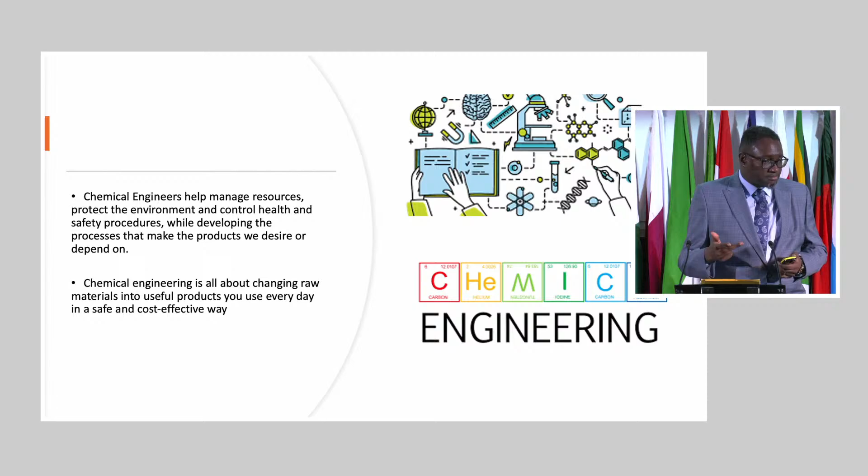Chemical engineering is primarily about taking raw materials and converting them into useful resources that benefit people and benefit society. And the aim is to ensure that it is safe, that it is environmentally friendly, and that it is done in the cheapest possible way, or in the most cost-effective way. And that really sums up everything that I've been doing as a chemical engineer for close to 20 years.

I'm going to ask you a question in a minute, because there's another group of people that actually do the same thing, who take raw materials and convert them into items that everybody uses every day. Can anyone tell me who those are? So they take raw materials, they take it through a process, and then convert it to things that we use every day. Any guess? That's right, very good, chemists. So I'm going to ask you in a minute what you think the difference is between chemists and chemical engineers. But before we do that, I'm going to take you through another poll here, which is, I'd like you to tell me which one's the odd one out.

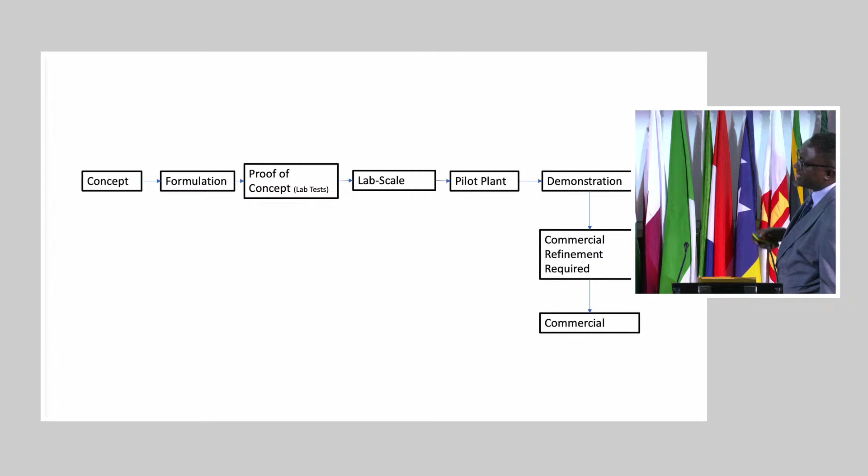And then at some point, when that's successful, you might have a company that says, we're really thinking of ways of reducing nitrogen oxides. So we're going to use one of our actual plants, and we're going to let you come and do this experiment on one of our actual plants. And we'll call that a demonstration.

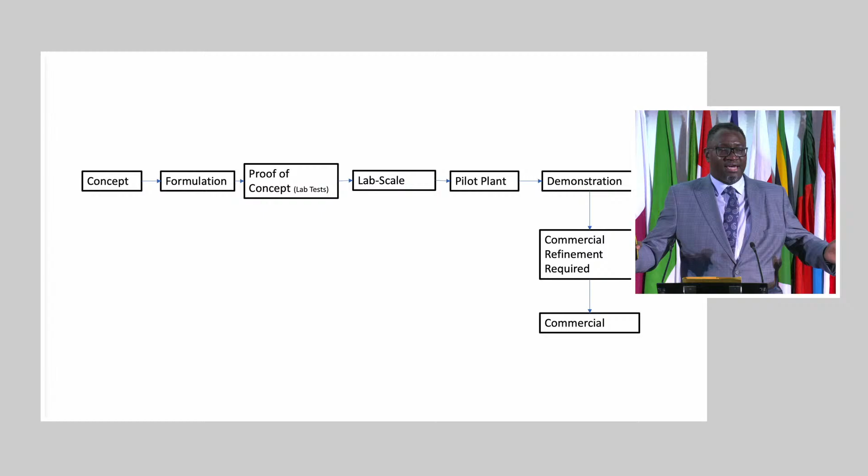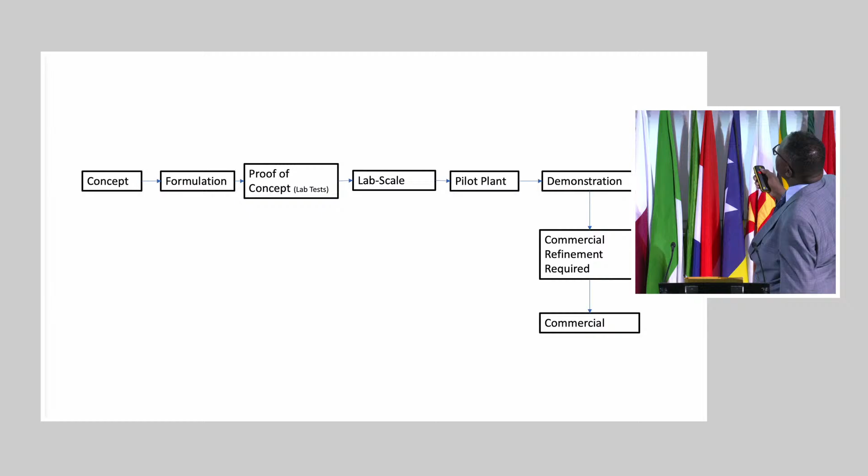So very often you'll hear that, oh, you've got this CO2 reducing technology, and it was successful at Shell, and it was successful at Longannet Refinery. And everyone will say, well, what's the problem then? Why aren't we doing it? Well, you've only really demonstrated it. You haven't done the commercial bit. And then you get to that point. So as you can see, there is a very long process of going from a concept to commercial.

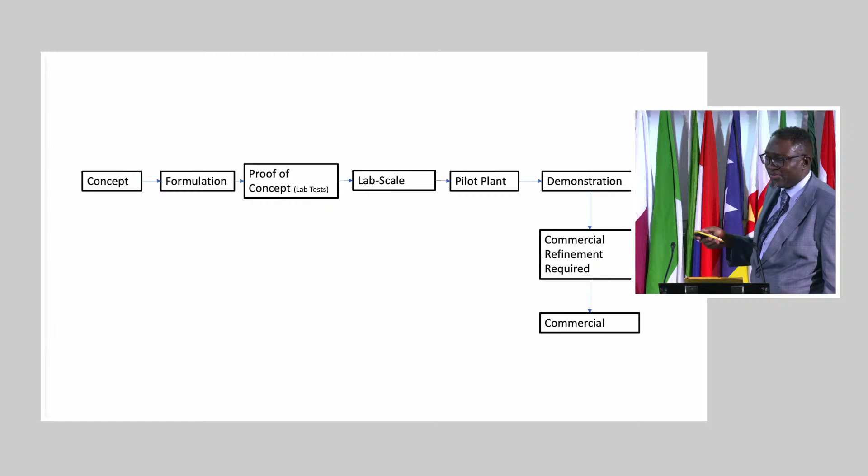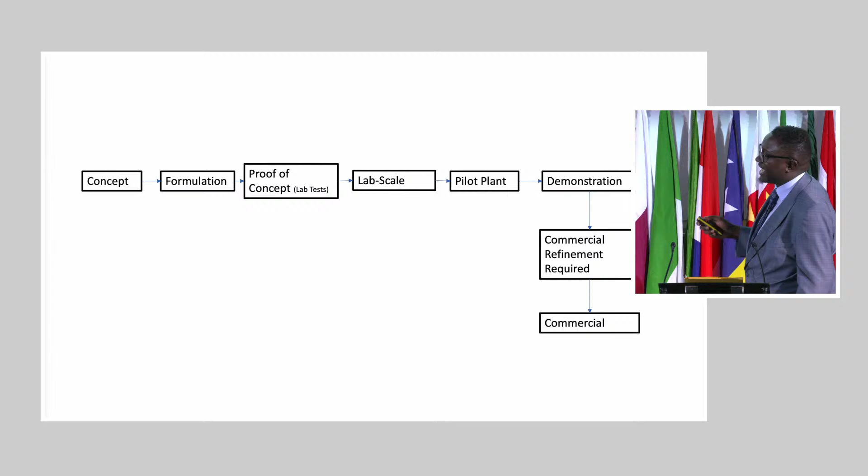So the next time somebody says to you, we've got this technology that is basically the answer to climate change, I want you to ask them this question. What stage in this process is that technology? And I want you now to think about all of the various ways of reducing carbon, carbon capture technology. Every one of them is somewhere along these lines. And at the moment, very few of those are actually at the demonstration stage, and even fewer are at commercial stage. So that's kind of where we are.

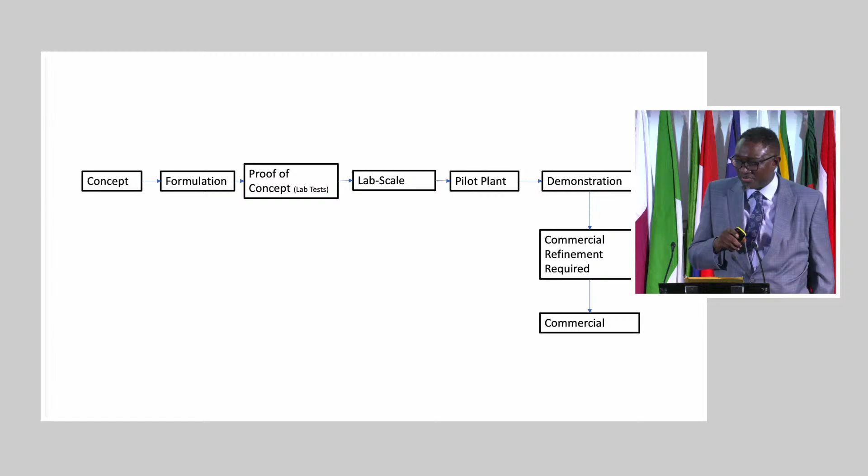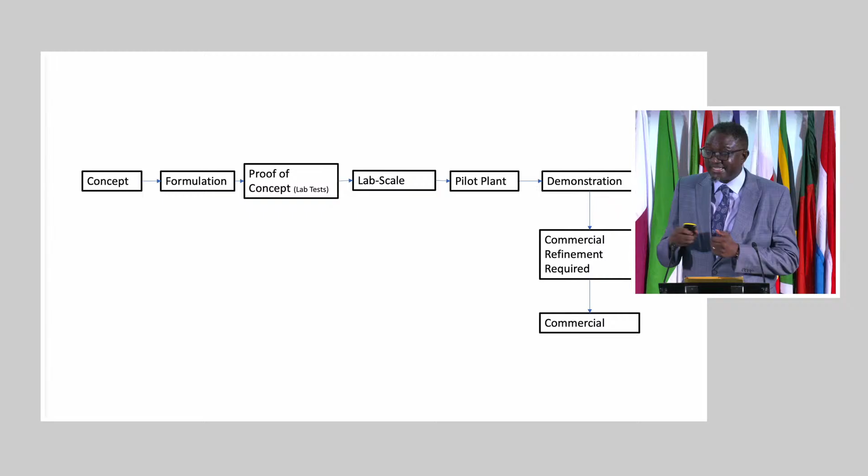And so the next question I was going to ask you, so this is going to the poll again. This poll question has to do with the energy transition, and it has to do with the process. So I'm going to wait till I see it on my screen because I jumped the gun the last time. So should we switch from fossil fuel to renewable energy directly and immediately? Or do you think that that process ought to be gradual? So who thinks we ought to be brave and just go for an actual switch? And who thinks it ought to be gradual?

So if you're an immediate sort of person, I'd like you to raise your hand up. Great, fantastic. I can see someone doing that. You have to choose a side. You can't. You're going to be a politician, I think, when you grow up. So who thinks it's going to be gradual? So more of you think it's going to be gradual. And he's still waving his hands.

And now, would anyone like to tell me, people who are immediate, why you think it ought to be immediate? I can guess why, but can somebody tell me? Someone who thought it should be. Yeah. The time for waiting until a transition has passed many years ago. We need to get into it now. Absolutely. Great, good. Were you going to add to the first or the second? Yeah, go on, add to the first one. Yeah, there is a policy framework aspect to this as well, and that should not be ignored.

Who thinks it's going to be gradual? I'd just like to know what you think. Lady here. That's right. That's right. You were indecisive, so I'm going to go for somebody else for now. I'll come back to you, don't worry. Yeah, and you? Yeah, that's very, very interesting. I'm going to come back to you now because I'm not going to be that mean to you. I'd like to hear what you think.

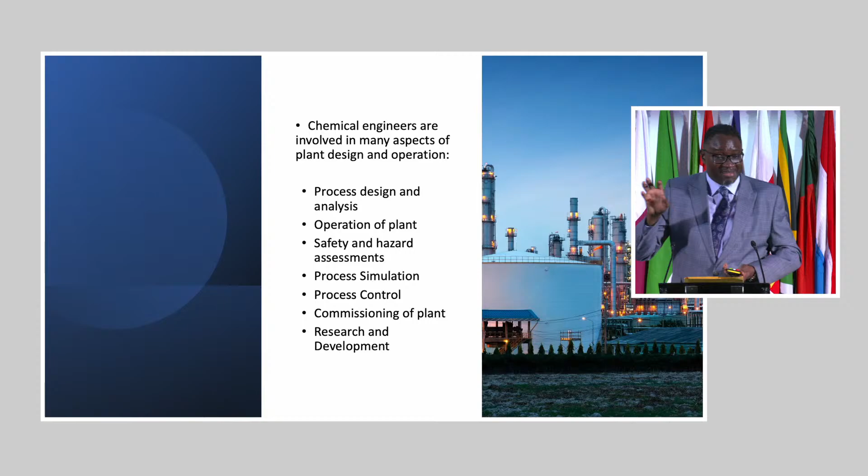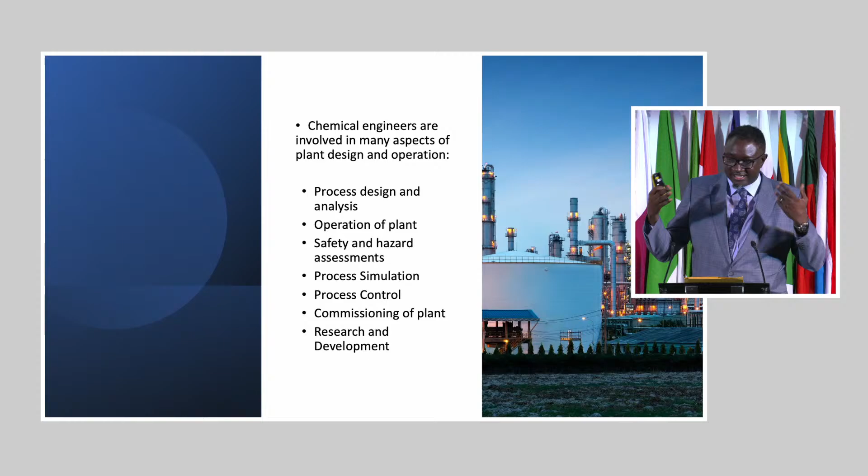And every now and then you get this problem where your theory, what you thought it was going to be, doesn't quite match what's happening in practice. And the process by which you bridge that gap, where I surround myself by a multidisciplinary team, and we all try and work out how we get to a solution, that, for me, is one of the most interesting things about being an engineer, because you solve a number of problems.

So which one of these companies does not employ chemical engineers? Go on. Oh, that's a different answer to what I've got in the past. Okay, anyone else want to try? Intel? Most people say Intel. Any other guess? Solar panels? Go on. Shell?

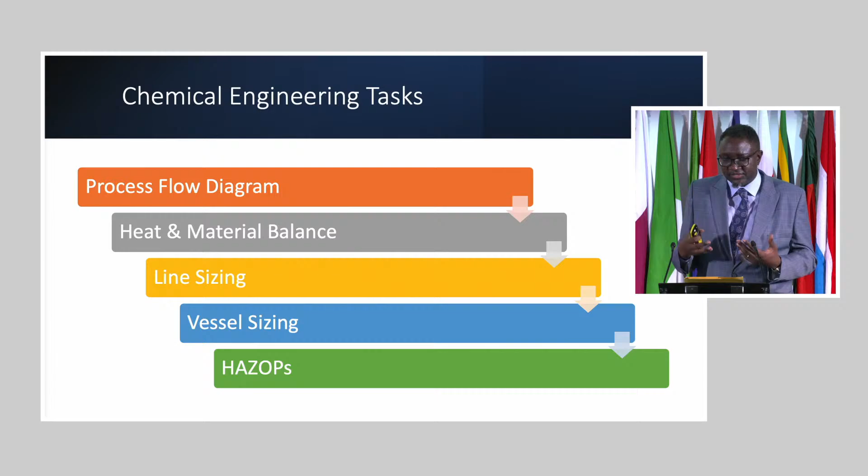And we've got something called a hazard and operability study. That's when I've designed my system, I'm starting to look at it, and I'm asking the question, what can go wrong? I look at various ways in which this can go wrong, and I try to address that. So that's a typical chemical engineering task.

Now, I mentioned process flow diagrams. Usually a precursor to a process flow diagram is a schematic. What you're looking at here is simply a distillation system. It's taking crude and converting it to various products, and it's using different systems in order to achieve that. And that is a process system.

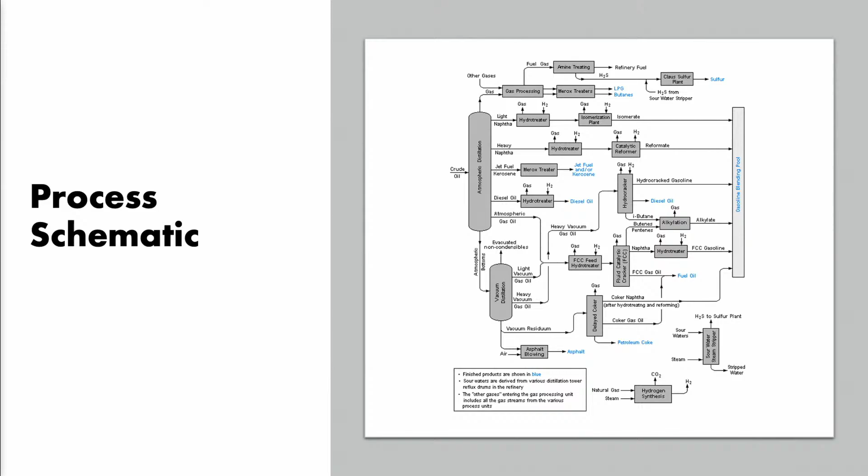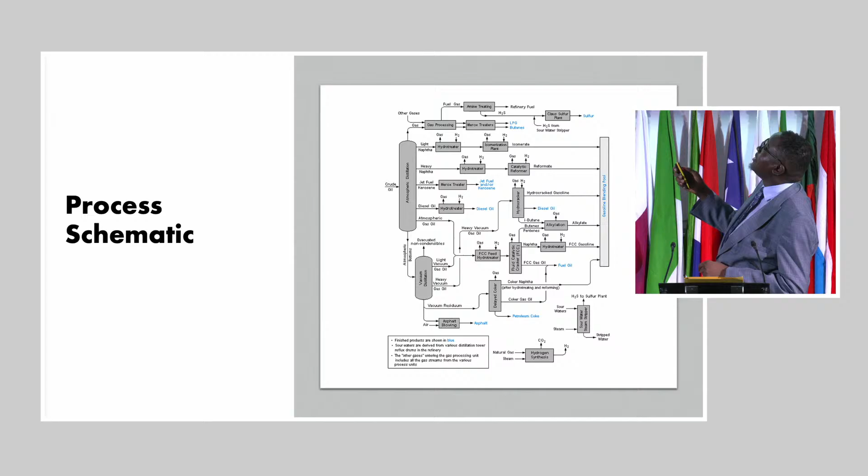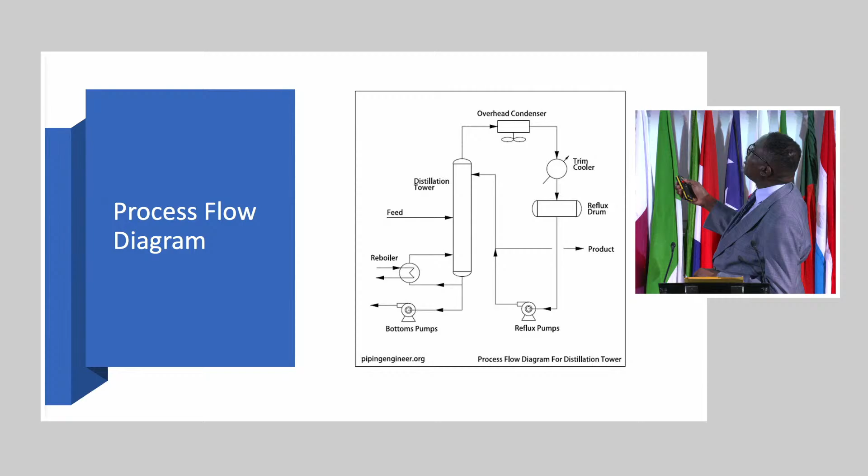A process flow diagram is far more detailed. This is taking just one part of it and looking at that unit. Previously, you had a distillation column there, and you get the impression that that's all there is to it, until you look at the next thing and see that you do have this whole system of control, of heating, of pumps around the same system. So we look at it in a little bit of detail.

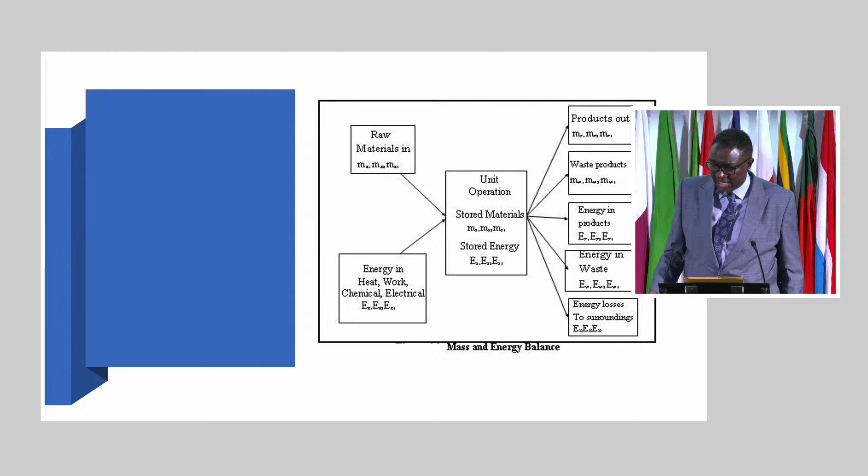I also mentioned heat and mass balances, or mass and energy balances, controlled by the rules of conservation of mass and energy. That's one of the key activities that chemical engineers do. So we're going to do one exercise now, and I'll see how well you do, just to give you an example of what it's like to be a chemical engineer for a day. You can tell everyone after this that you're now a chemical engineer. So here's a simple task. We have a system, might be a distillation column, might be a separator of some sort.

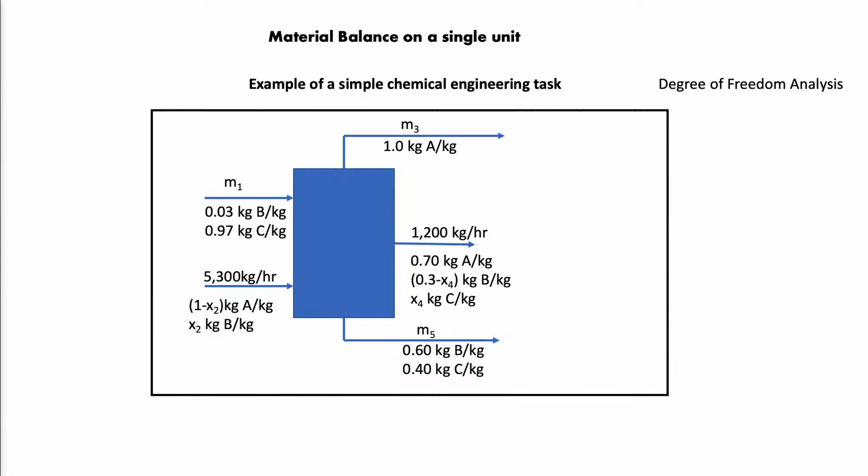But what we are doing is we are putting two products into the system, and that is leading to some gas coming out of the top, and it's also leading to some liquids coming out of the bottom of this system. You have some information already, so you know, for example, that for this stream here, M1, you know exactly what the composition is. You know that that is 3% by weight. You know that that is 0.97. You know that you've got three products, A, B, and C. And you also know what this flow is. So that's what you know in terms of the inlet.

In terms of the products, you also have a bit of information. You know, for example, that what's in M3 is 1 by weight. So, sorry, 100% by weight, because it's 1. And we know that it only contains one of the three products. We know what the flow rate is of this stream, and we also know what the composition is of this stream.

So I want you to give me an idea now. If I was going to solve this problem, my problem is to find out what the unknowns are. How would you go about it? So I'm going to get your ideas. I want you to teach me now. So if we were going to solve this particular issue, how are we going to find the unknowns? So what's the first thing that you'll do? Any takers? Yeah, I'll go with you.

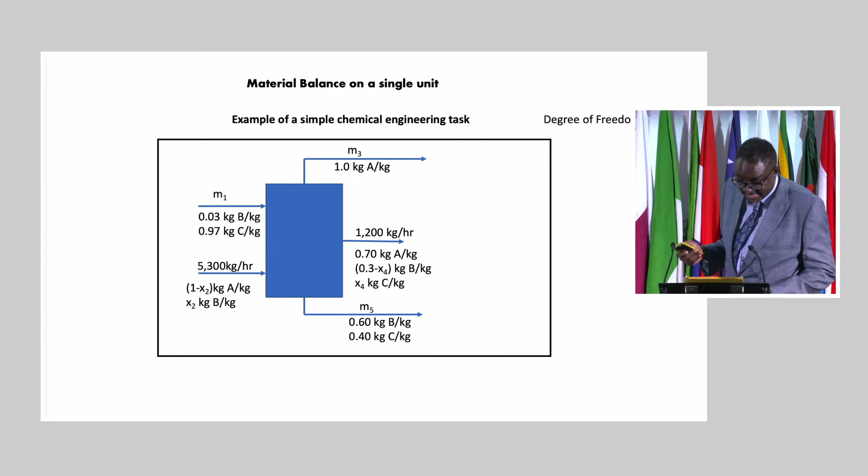And that person then tells you, and I'm going to read it out to you, that M3 is half of the flow rate of M1. And also tells you that 90% of product C is actually down here in M5. So you now have 5 unknowns, 3 relationships, and 2 additional facts that I've just given you. So where does that leave your degrees of freedom? 0. So the system is now solvable.

So what I'm going to ask you, let's see who can multitask here, who can basically solve that problem that I've just given you, and who can tell me what the unknowns are, based on the fact that we now have 0 degrees of freedom. Who can tell me what the unknowns are? And whoever can do that, we're gonna find a way to get that person a prize. So whoever can do that first.

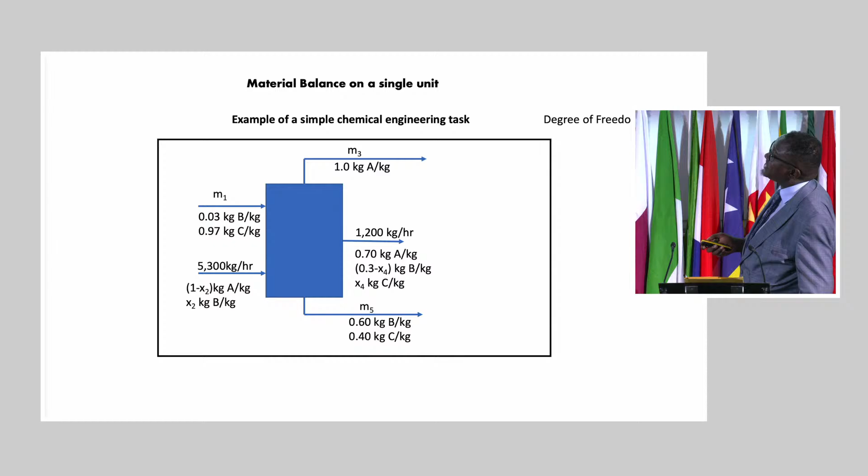So I'm gonna carry on with the rest of the presentation. And before I do that though, because I'm nice, I'm gonna give you a few clues. So the first equation that you've got here is M1 plus 5,300 kilograms an hour is equal to M3 plus 1,200 plus M5.

So that's the first thing. So that's the conservation of mass in application. You've also got the same if you're looking at each of these products. So we know, for example, because this is not a chemical system, it's physical, that all of A is equal to all of A in the products. All of B, so that's

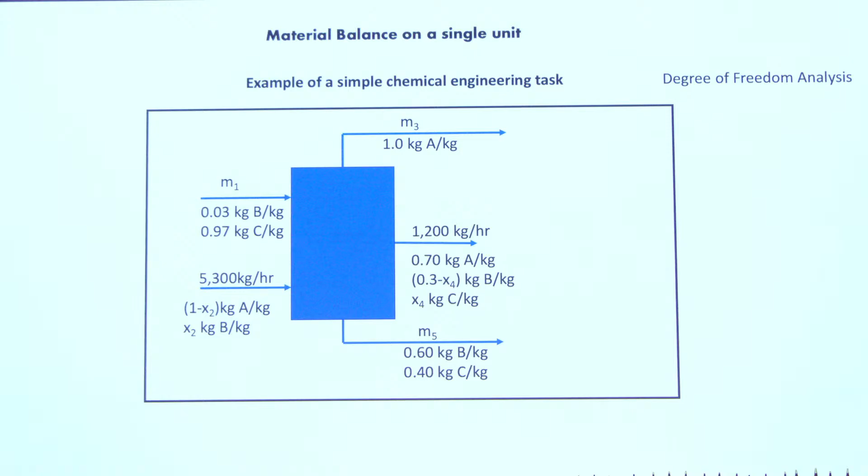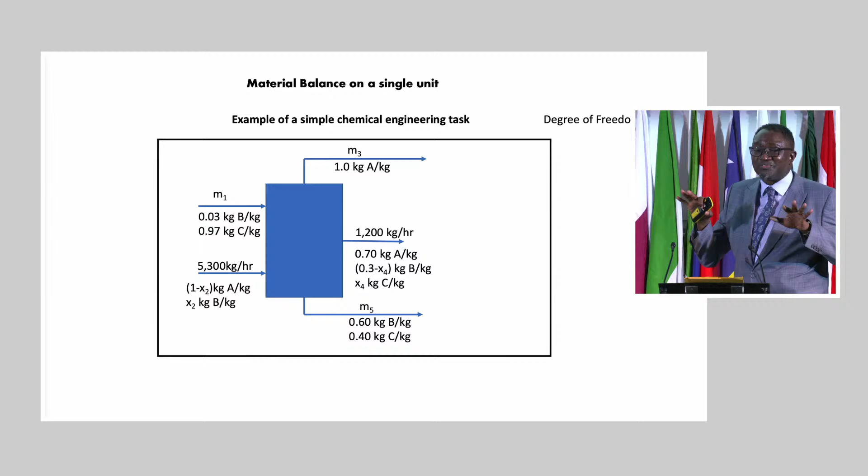But I'm going to stop there because ideally I would like to have taken you a little bit further, but I'm conscious that we may not get enough time. So if any of you can solve that for me first, whoever gets it first will win a prize of some sort. But that's the process that we've just been through. So let me just go through very quickly what I've been talking about so far, so that you've got a good idea of where we are.

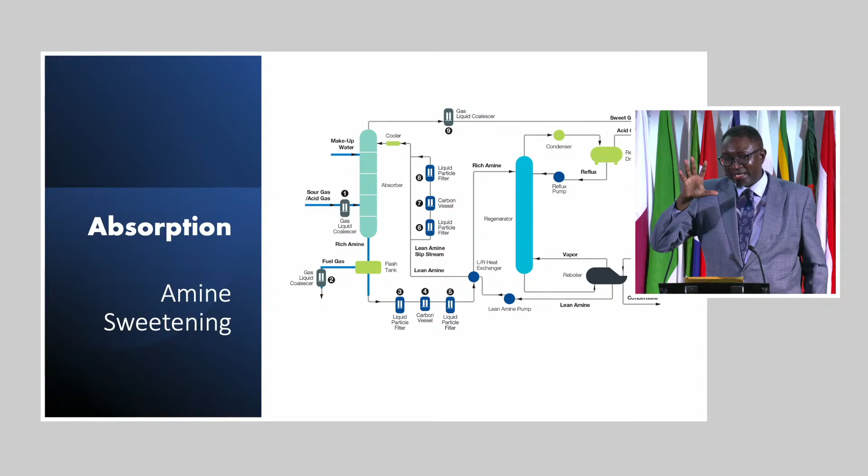So I started off talking about some of the sustainable goals we have in this world, and I tried to define the role that engineers play in it. Then I've taken a step back and looked specifically at chemical engineering and why what we do is so important. The main thing I've said is that the difference between a chemical engineer and a chemist is that we're the ones who take the concepts chemists come up with, and we come up with solutions. And we do that by scaling things up.

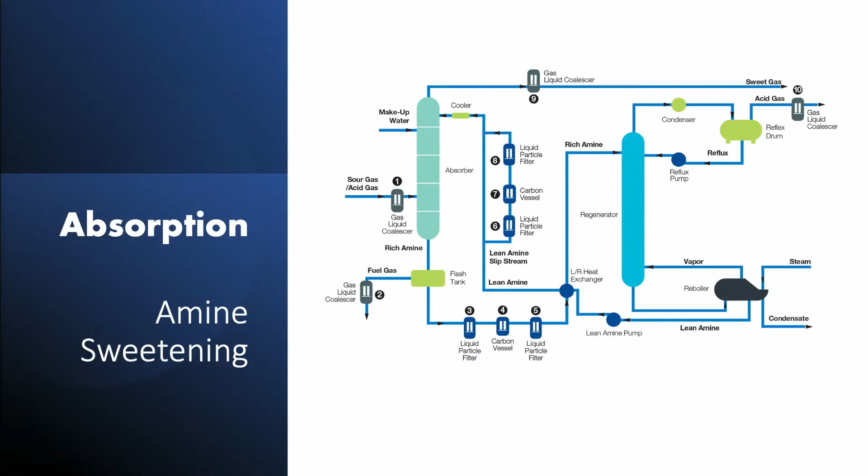So here are a few other examples of things that chemical engineers do. We have a process called absorption, and it's a way of ensuring that if you have gas with a high amount of sulfur in it, it might have mercaptans, but sulfur, who can tell me why sulfur is dangerous? Why is it important that we do not have high amounts of sulfur in our gas? What was that? It's toxic. So why is it toxic? Yes, which is bad environmentally. Someone else at the back? Oh, sorry, would you mind saying that again? Right. I didn't fully pick that up, but yes.

One of the main reasons we don't want it is the reasons you've mentioned, but it's also corrosive. You can have sites that have been running for a long time with this sour material, and over time it will affect the walls of your vessels and your piping, and potentially lead to a disastrous event. So it's bad from a safety point of view and from an environmental point of view. So generally we try to get rid of the sulfur, and this is one of the ways we do it.

We come up with a vessel, a bit like the one we have here, called an absorber. And we run an agent through it continuously. So you have a liquid amine reagent, or it could be something like urea, that gets run through these absorbers, contacts the sulfur in here, and selectively picks it out. So it selectively removes the content that you don't want. And there are different ways of doing that.

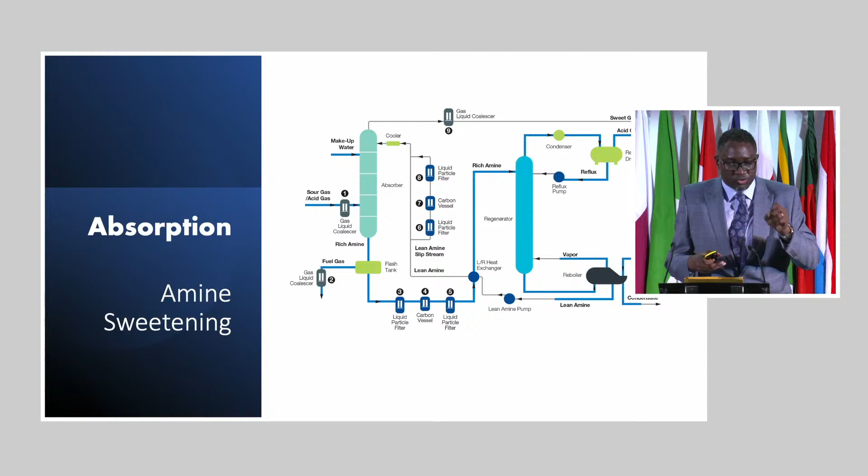Some of those systems operate just like this, like an absorber, and they get passed on. And we also come up with ways of ensuring that that's sustainable. So absorption is one of the important ways, and it's basically a link between gas and liquid. When you have a system in which you use a liquid to selectively remove a certain undesired component within a gas stream, we refer to that as absorption.

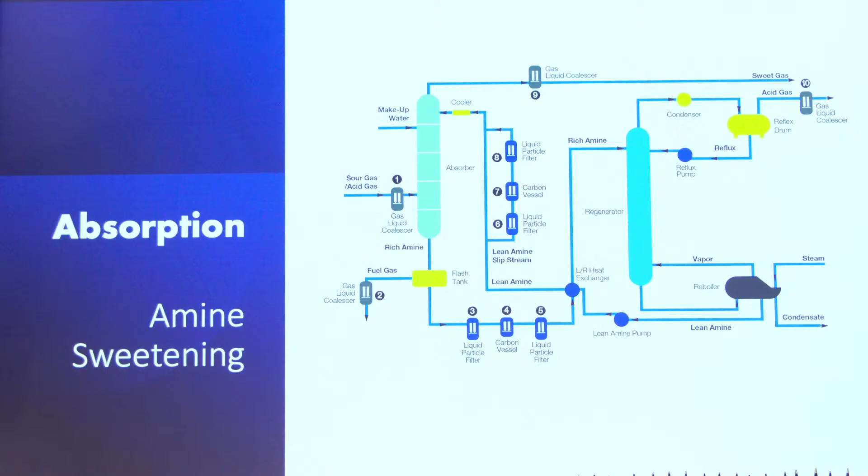So that's one of the processes that we work on. Another process that we work on is something called adsorption. And adsorption refers to using a solid material.

So just before the lockdown, I was working on a project. The company I was doing this work for had identified a huge gas stream that was going to be transferred into a site called St. Fergus, and from St. Fergus was going to be transferred to users all over the country. But what they found was that that gas stream had high amounts of mercury in it. And obviously you can't take that into people's houses.

So what we did instead is we created something that we put at the front end so that as soon as the gas comes into this plant, it comes in contact with this system. And this system has a number of items. We call them molecular sieves. They look a bit like beads.

They're like beads that have a number of pores in them. And those pores are about the right size for the molecules that we're trying to get rid of. So we found the appropriate molecular sieve for mercury, and they were able to take those out of the system. And then you get your cleaner gas.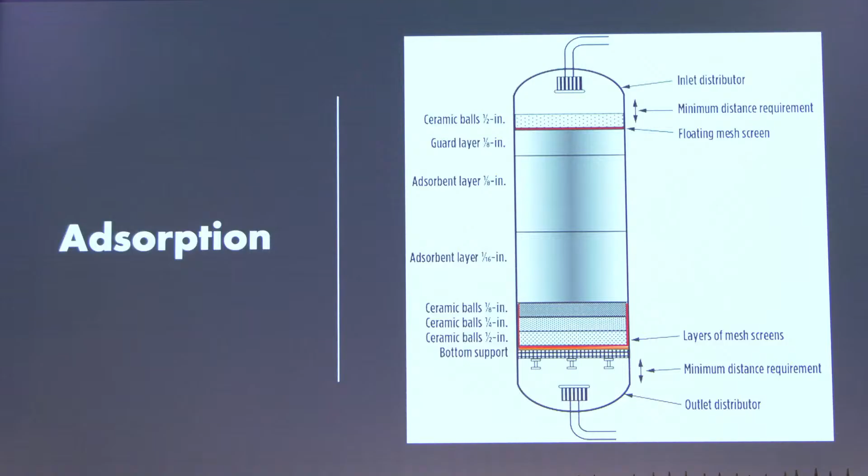So that's adsorption. So if anyone asks you, what is the difference between an absorber and an adsorber? I want to see who's been listening. What's the difference between an absorption process and an adsorption process? Anyone? Correct.

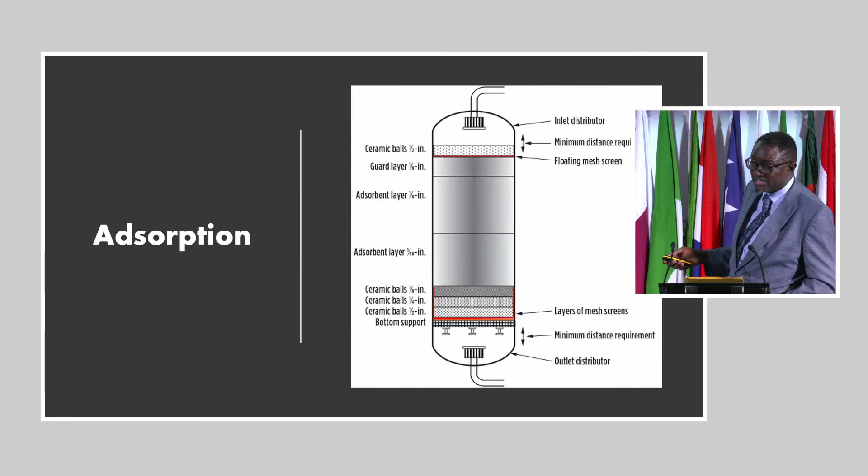That's right. So with an absorber, you're taking a liquid system, you're putting that in, and it's selectively removing the item you want to get rid of. With an adsorber, you have something that is basically located in the vessel, doesn't really move much, and you're putting the gas through it.

One place you have a similar system is with the catalytic converters in your car. Most of you probably use the AdBlue solution, and that's a urea-based reagent used to get rid of any NOx, especially if you drive a diesel car. So that's a similar system.

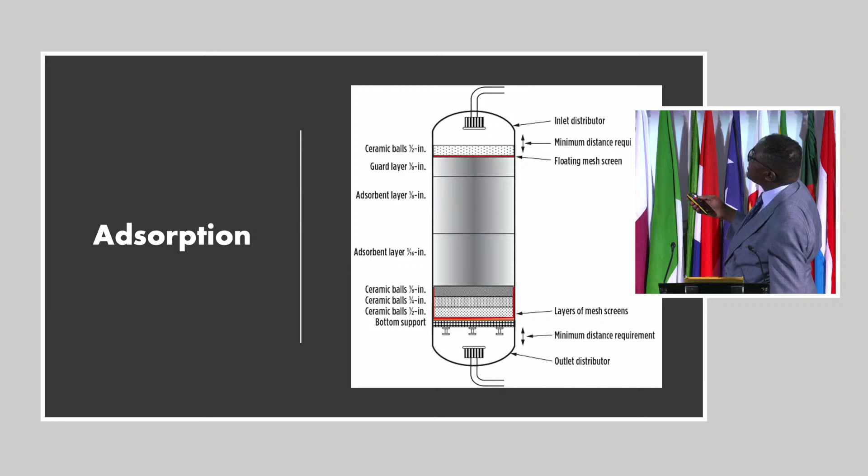But the impact of the operations that we work in has created concerns amongst a lot of people, because these are reminders of the systems that are also contributing massive amounts of CO2 into the environment. So the question a lot of people are asking, given I've just described what a chemical engineer does:

How does this fit into the world we're trying to get to, one in which we eventually move to a much higher percentage of renewable sources? How do we meet some of the requirements that have been made by the IPCC? And I've got a quiz coming up on the IPCC and some of those issues. How do we do that?

Well, we do it through something called the energy transition. The energy transition is a pathway towards transformation of the global energy sector from fossil fuel-based to zero carbon by the second half of this century. At its heart is the need to reduce energy-related CO2 emissions and to limit climate change.

What are we actually trying to get rid of? The carbon emissions are usually put in three categories. You've got direct combustion, a system that's burning fuel, putting that CO2 into the atmosphere. We refer to those as scope 1. You may then have purchased electricity, and the emissions linked with that we refer to as scope 2.

But then all of the polymers, all of the items created as a result of these processes, are also coming into products that you and I use every day, and those still matter. So every time you hear a company saying, we've reduced our emissions by 90%, very often they may be referring to scope 1, but you've also got the downstream impact of their activities. And those are the questions we should be asking them, and holding them accountable.

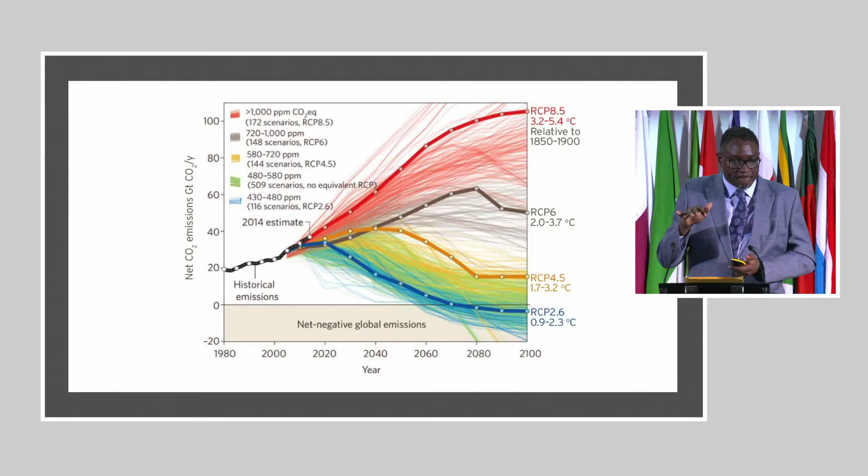But every integrated assessment model that has looked at this has indicated very clearly, very strongly, that unless we incorporate a certain element of carbon capture, there is no way we are going to reach those targets. And part of the reason for that is a discussion we were having before, because there are a lot of technologies out there, and there are actually many governments driving this very strongly now.

But even with that, we still only have less than 40 successful carbon capture demonstrations around the world, even at this stage. And remember, I said demonstration, not commercial. And only about 17 of those projects are actually commercial, and most of them are linked with enhanced oil recovery. So whatever model you're looking at, there is no way of achieving this that does not involve some form of carbon capture, and therefore does not involve engineers, and particularly chemical engineers.

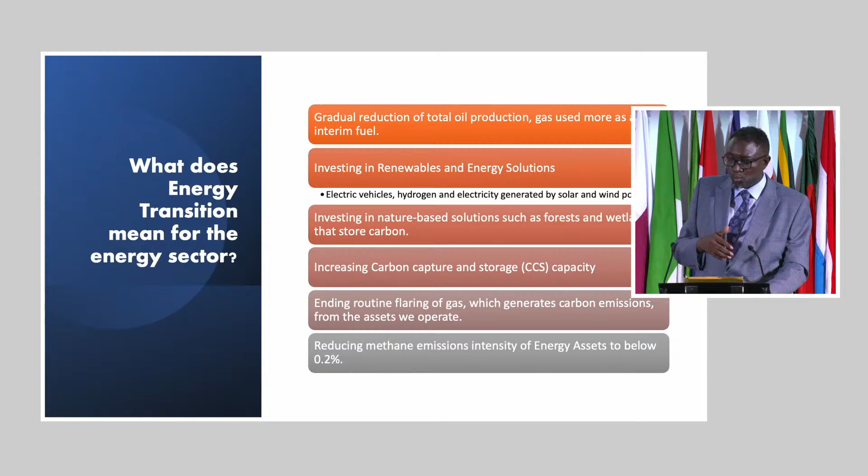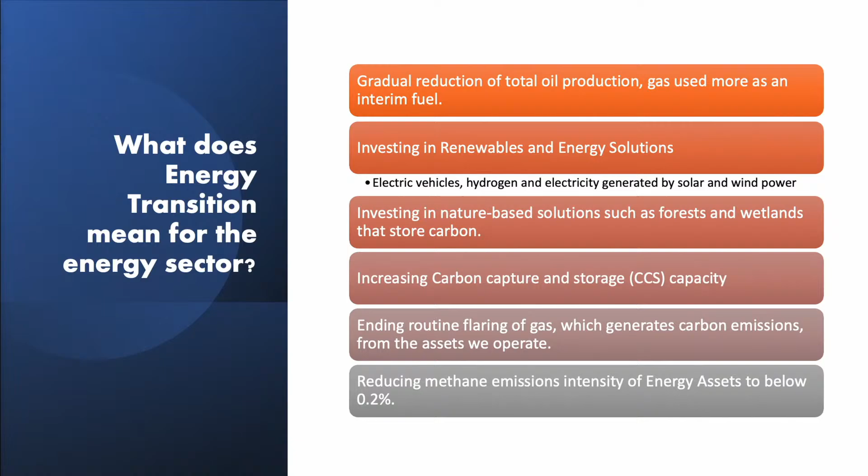So bearing that in mind, what is the role of chemical engineers at this particular stage? What is our role? Because the energy transition is about a number of things. As much as you and I would want us to switch completely to renewable sources, as has been mentioned before, that is not a realistic picture. For various reasons: many of the technologies are not developed to that stage, and their commercial value isn't proven to a stage where they can be relied on fully.

Also, you have a number of industries, such as shipping, that will still rely on fuels like diesel. And thirdly, the fuel that we get out of the ground isn't just used for transport. It's also used as a source material for various products, for various polymers. In fact, if you look around you, there are very few things that have been made without the involvement of fossil fuels in some way. So it is something that we are going to live with for some time. That said, there is no reason why we shouldn't be accelerating and expediting some of the solutions and making sure that they work.

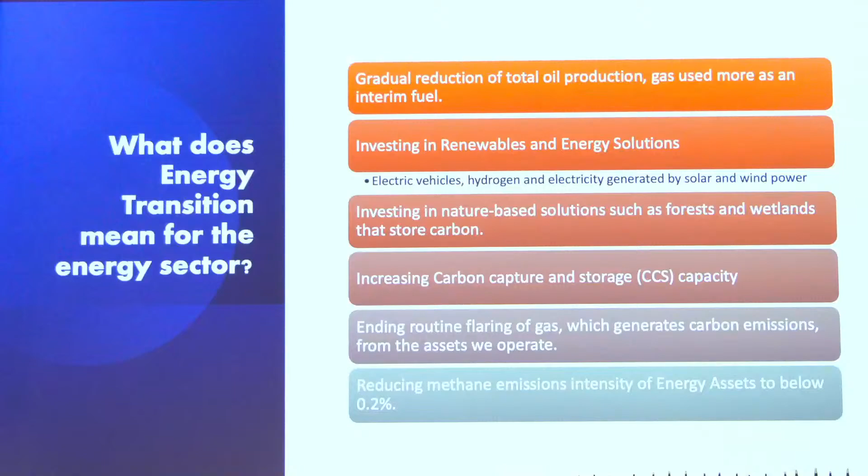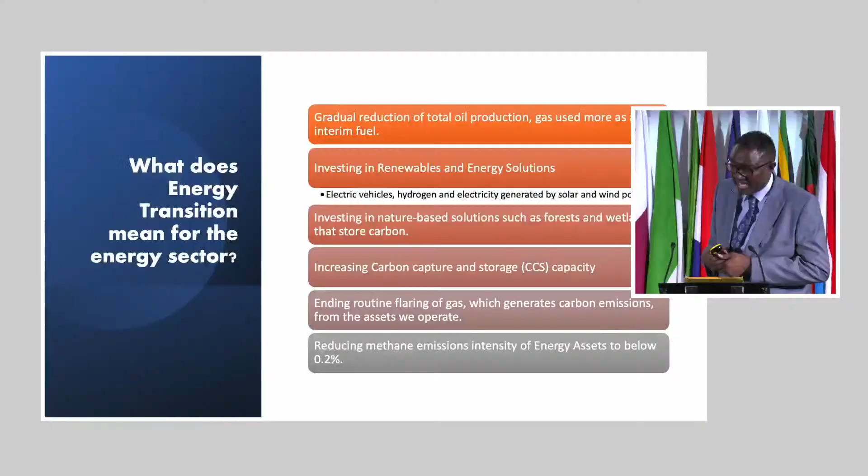So in terms of the energy transition, what does that actually mean for us? It means the gradual reduction of oil production and the use of gas as a more interim fuel. It means companies investing in more renewable energy solutions. It means investing in nature-based solutions, such as forests and wetlands. It involves increasing carbon capture, ending the routine flaring of gas, and reducing methane intensity to below 0.2%. And we can do that by ensuring better efficiency in the way that we measure.

So for a chemical engineer, that means two things. We need to come up with a set of solutions that affect these two areas. Some solutions are more digital, more numbers-based. They have to do with reducing the amount of human interface. Because if any of us was going to travel offshore to work on a process plant, that generally means somebody gets on a helicopter and gets to an offshore platform, and you often have many people making that journey.

So if there is a way that we could reduce that, that's one way of ensuring that we're reducing our emissions. You could have a system whereby, instead of operators having to do all the work, you find a way of introducing more automation. And that ensures that you have less human interface and therefore less travel. And that also reduces emissions. So that's on the digital side.

You also have ways of ensuring that you understand processes better and therefore can make them run a lot more efficiently and use a lot less energy. And that too is a digital method. So the solution has a digital leg. The other leg has to do with a non-digital area. And that's to do with battery storage.

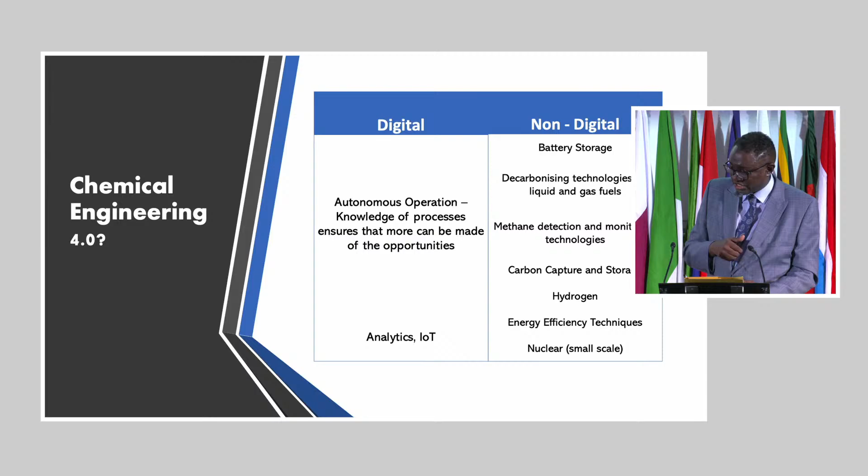It's to do with decarbonizing technologies, such as renewable diesel. And I'll tell you a little bit more about that. It may be to do with methane detection, carbon capture, and so on. So those are some of the areas that we need to look at. So I'm going to give you a few examples of some of the projects, some of them I've worked on, some of them I haven't, but they are projects that are taking place that have to do with some element of that.

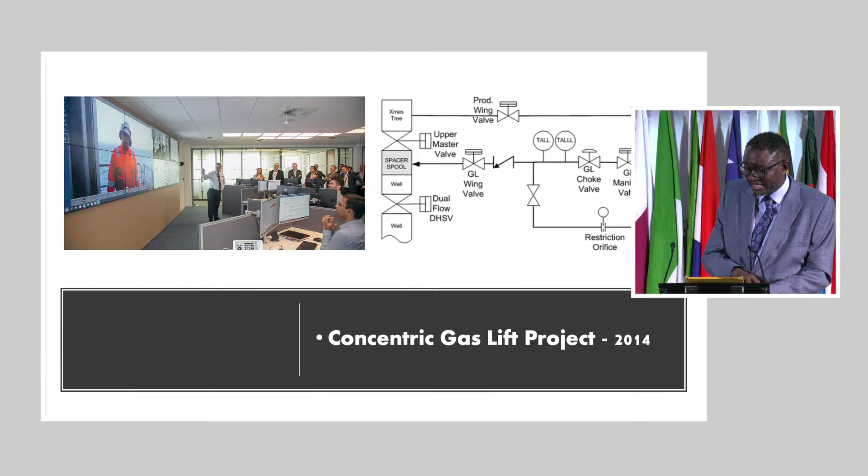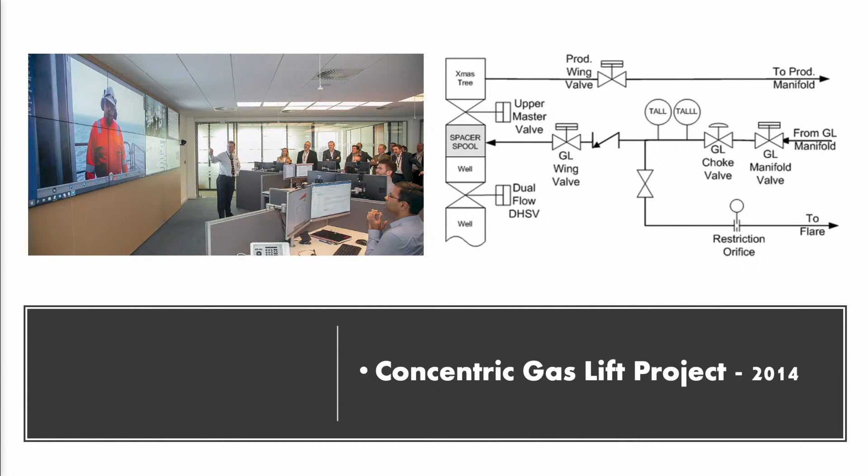So in 2014, I was working on a project called the Concentric Gas Lift Project, and it was a way of ensuring that we could basically get gas out of wells that had liquid loading on it. So the liquid was blocking off the gas that we were trying to get out of the ground. And we'd been working on this for a while.

I was the main engineer working on this, but I never had to go offshore. I was able to sit in a smart room, and I was able to communicate with a lot of people offshore, and we were able to get this done. So that's a very kind of low level. But more companies are thinking of that as a way of reducing travel. But that's quite low level.

We then also have the fact that rather than, I said I was talking to operators, but you could have a digital operator. So this example here is a good example of that. Can we get the sound, please?

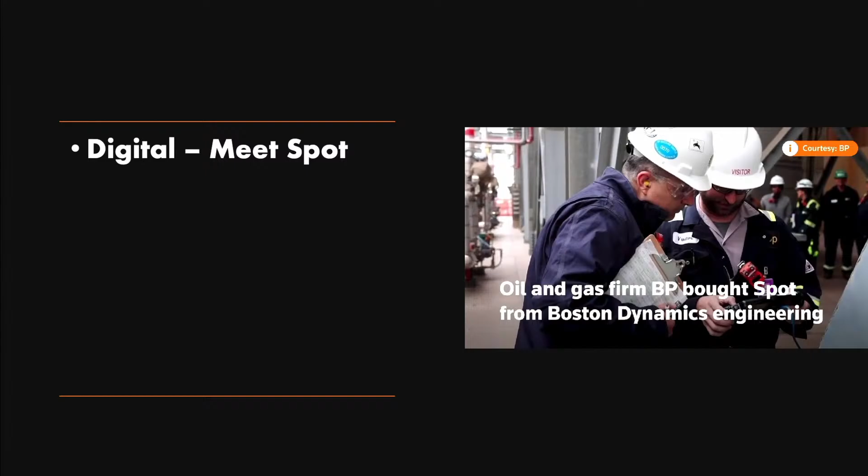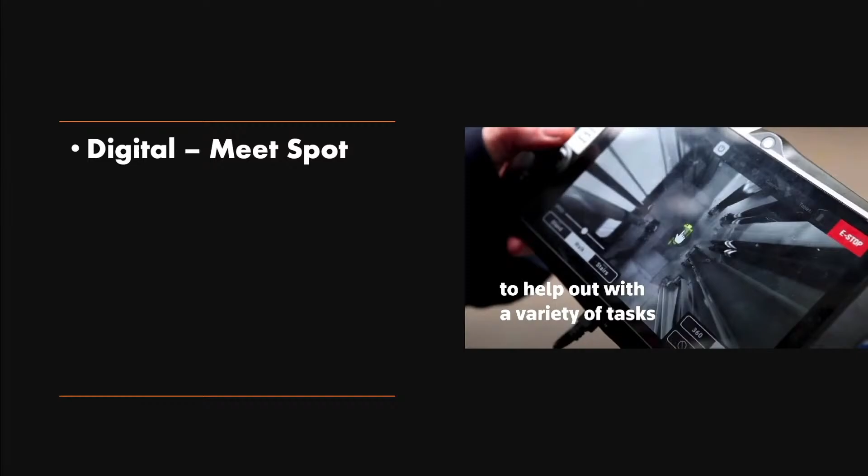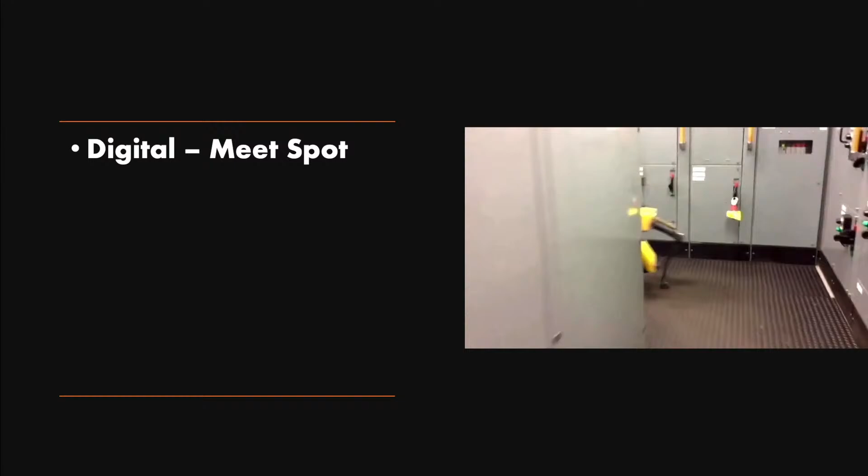Several hours a day, several operators will walk the facility, read gauges, listen for noise that doesn't sound right, look out at the horizon for anomalies, boats that may not be caught on radar, look for sheens, and so on. So primarily right now, what we're doing with Spot is really trying to replicate that observation piece so that I don't necessarily need an operator to go do that. I can have an operator actually review that information from a central location, if you will.

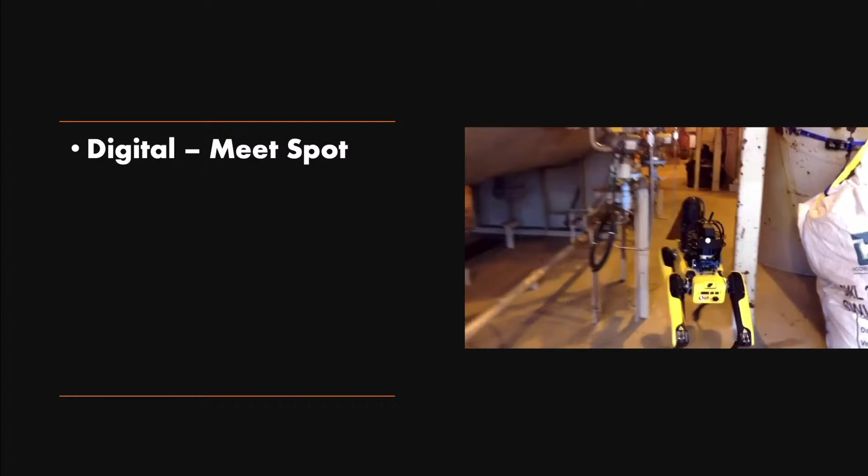So yes, I'm going to move on to the next one. Basically, what they're doing is they're actually getting this to work in such a way that these robots can actually see things that you and I won't be able to see, particularly to do with methane emissions. So that's something that is already kind of in place and is starting to happen.

The other way, and for me, this is one of the most important aspects of this, if we accept the reality that in the meantime, it's hard to escape, whether it's making steels, whether it's pharmaceuticals, whether it's even trying to get hydrogen, blue hydrogen, or whether it's trying to design things that you and I need on a daily basis, we will still rely on the use of fossil fuels.

And therefore, one of the most important things we can do is carbon capture. And as I mentioned before, there is no way of solving the problem of climate change right now that does not involve some form of carbon capture. So let me do this very quickly, because I know time's fast spent. How much CO2 is there in the atmosphere? Quick answers.

Very good, very good. How many trees are there in the Sahara? What was that? Did you say 3? That was not a serious answer, sorry. How many? Guess? Just guess a random number. What was that? Ooh. 100. 1.8 billion.

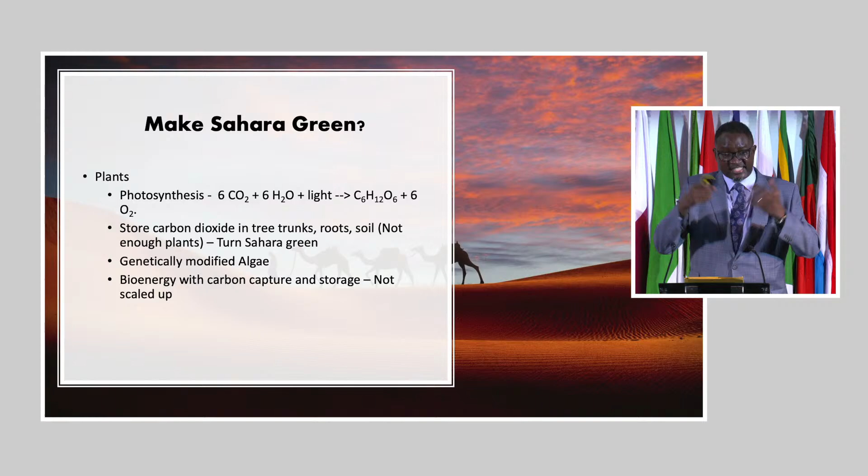And you could also have genetically modified algae, where you basically get those to trap in a lot more CO2. You could use bioenergy with carbon capture and storage. But the problem, as I mentioned before, is most of these have not been scaled up. And remember what I said, that the role of a chemical engineer is to scale things up. So I'm going to skip this question just because of time.

But there are a number of ways that we can capture carbon, but they fall under 3 key areas. So you could have a post-combustion removal. So basically, you already have this CO2 that's formed, and you can either use an absorber or an adsorber to basically remove that CO2. And that is still one of the most commercial ways of achieving this. You could have a pre-combustion process. It's a process we call gasification.

Oh, you've got the answer? Okay, so since you are the first to raise your hand, I will listen to your answer immediately after this.

Thank you. So we got the post-combustion from the flue gas, and I take it most of you understand that flue gas is simply exhaust gas, right? Okay, and then you got the pre-combustion, a process called gasification, where you basically use fuel and oxygen, and you create a combination of hydrogen and carbon monoxide, and that's referred to as syngas. And not only does that provide you with a really good source of hydrogen, you can also use that through a process called the Fischer-Tropsch process to create a lot of other useful items that you use every day, and that can be a very effective way to do that.

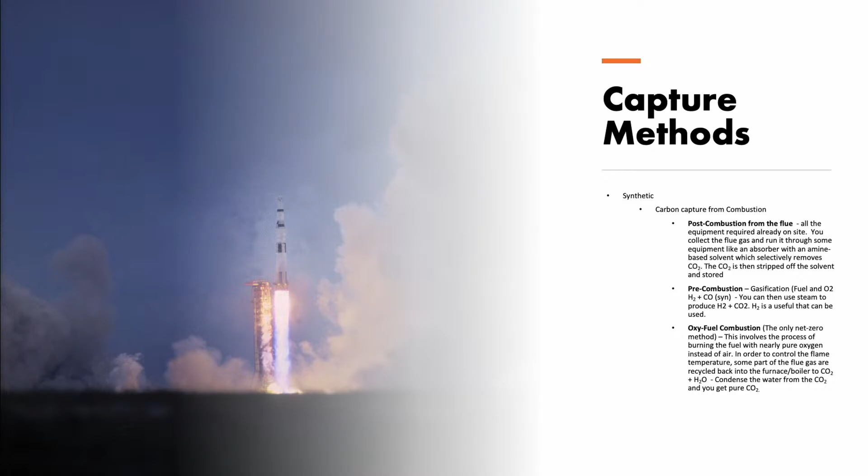And you've also got oxy-fuel combustion, which involves the burning of fuel with oxygen in order to control flame temperatures, so that some part of that is recycled into the system. So that's the oxy-fuel system. And so to summarize those particular systems, you can do that using these 2 systems here. So as I mentioned before, you can have an absorber, which remember I said was using a solvent, usually an amine-based reagent, in order to remove the CO2 selectively from the flue gas.

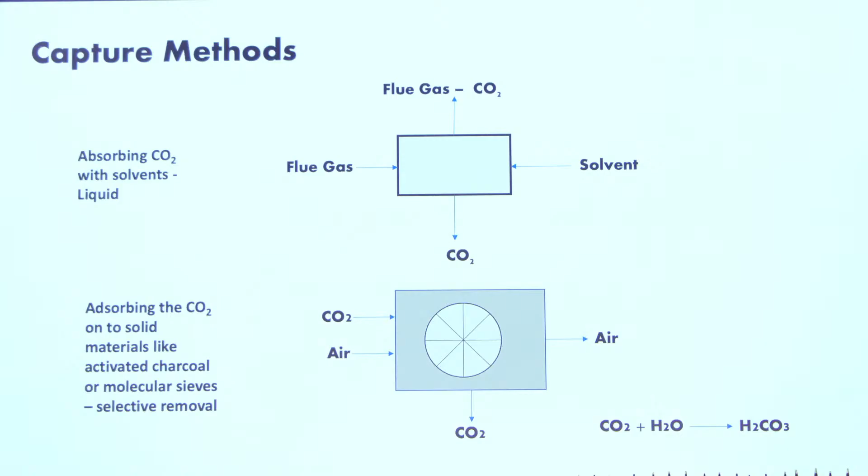You can then take that CO2 and direct it into storage, and that can be underwater or under cave systems. That can then be transported and used. You can also have a system where you have something like activated charcoal, or molecular sieves, as I mentioned before, and those are then used to selectively take out the CO2. You can usually then use that CO2 to create a carbonic acid, and then heat that up to remove the CO2 and use that in your storage. So that's one of the systems that you can use.

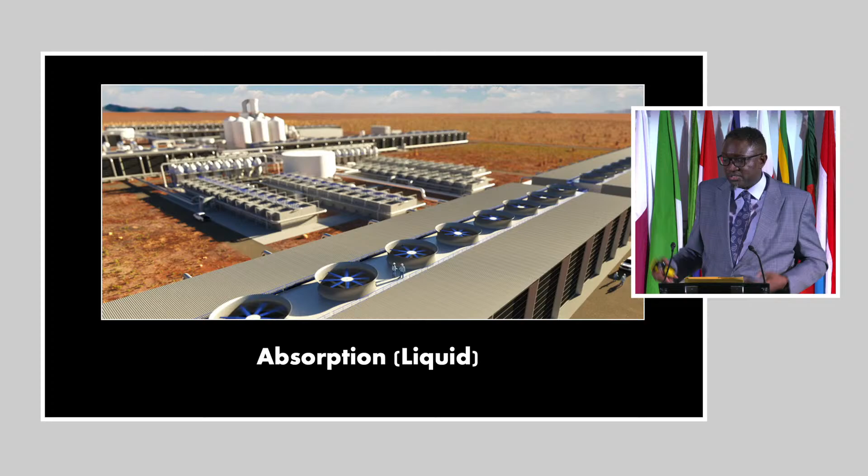And as I mentioned before, the ocean is quite a good sink for that. Here are a few examples of an absorption system that has been used out in the open. These are actually systems that are operating today. There's a company called Carbon Engineering, if you look them up. They've come up with these systems where you've got these cooling towers. You do have your systems inside it that are able to basically take out the CO2 from the air. You can then store that CO2, and that CO2 can be used in various ways. And that's by a company called Carbon Engineering.

So this is an example of the system. So you've got this air intake. The air is drawn into these cooling towers. You then got a basic solution. I can see Professor de Knees there, so we're talking about chemistry now. And you've got your basic systems, and you were able to use that to create carbonate, and you can also then get the CO2 out of the system, and you can store it.

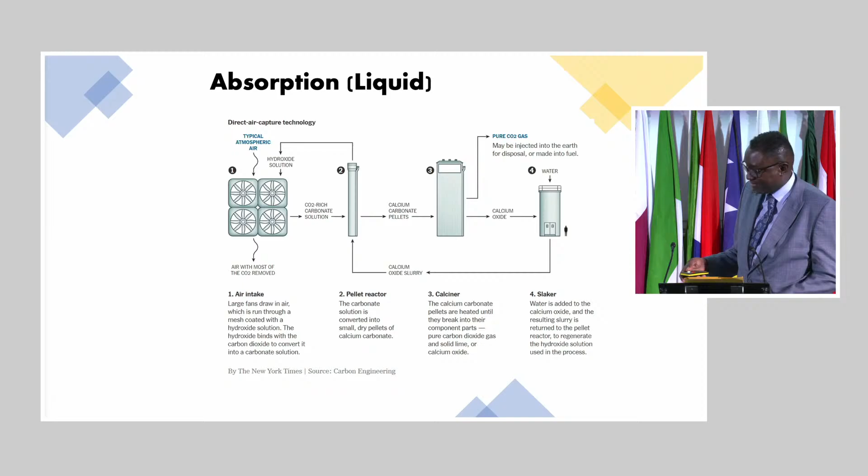You've also got another system, which is more of a sort of direct air capture. And that's using adsorption this time as opposed to absorption. And it operates in a way that your catalytic converter operates at home. And again, what you've got here is you have a system that can be regenerated. That system sits in a vessel or sits in your system.

You collect the air that selectively removes the CO2. That can then be heated up and regenerated so that it can take on the next batch. You can take that CO2 and you can store it, and you can do a lot with that. This has been done by a company called, I love their name, Global Thermostat. And Global Thermostat have done these with ExxonMobil, and they have it installed onto their systems.

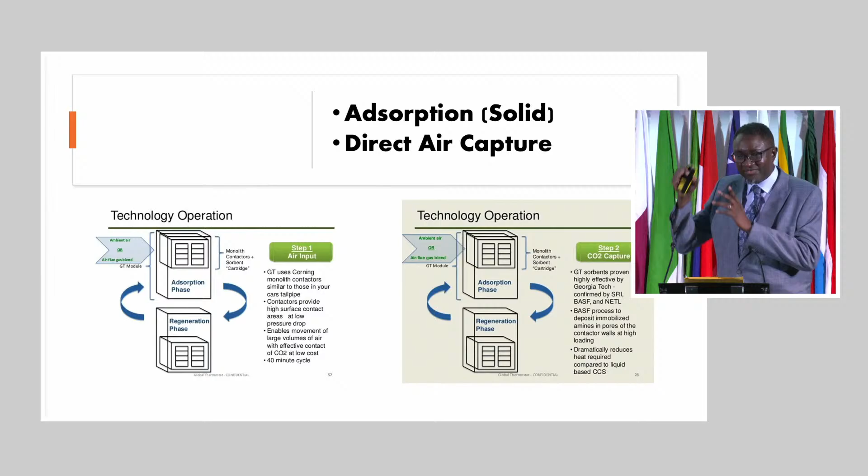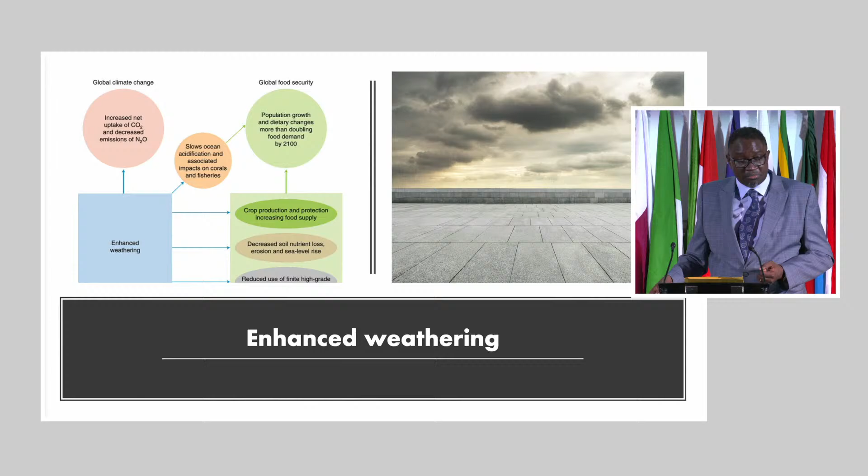You've also got something called enhanced weathering, because what happens is very often when you emit these gases, they combine with moisture, they create acids. These acids fall onto rocks, and they actually get stored in the rocks in some form of carbonate. What you can do is you can create a system, maybe something like a quarry, where you have a number of these minerals that are able to suck in the CO2. And again, this is still at a sort of very much a pilot scale, but it's something that is being worked on. This is probably my last quiz for today.

So which was the world's first fully integrated industrial scale carbon capture and storage project? First one. Anyone want to guess? Yes. It sounds to me like if you just say Norway, you probably get the answer right. So yes, it's Norway. That was the first one.

And the second question I'm going to ask you, because it touches on a different way of meeting our net zero emissions targets, is what is the world's simplest molecule and potential source of clean energy? Hydrogen, exactly. And you can have reformer units which are used in refineries, and you can use that to actually create hydrogen through the breaking down of hydrocarbons. And we often refer to that as blue hydrogen.

But you can also have a system where you basically take it out of water through electrolysis. And you can do that on a larger scale, and that is referred to as green hydrogen. Unfortunately, we are not yet developed in that stage of producing green hydrogen to a point where it can be scaled up. But that too is still going on.

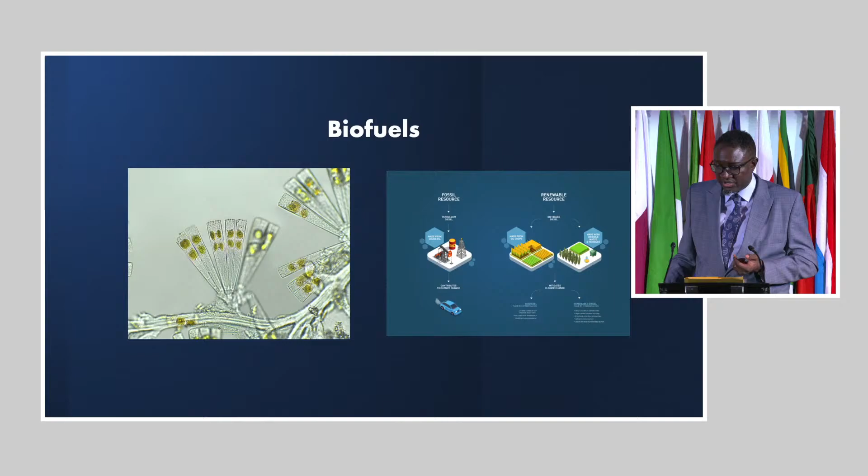You also then have biofuels. And I would like to show you this. This is probably my last video. And this is a refinery in Singapore. It's owned by a company called Neste, and they're based in Finland, but they have the world's largest renewables refinery. And they produce something they refer to as renewable diesel. And I'll just show you a few clips from that.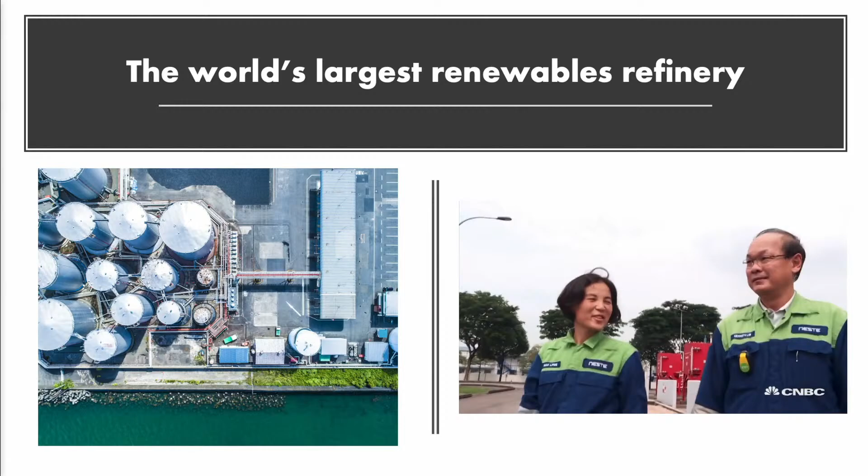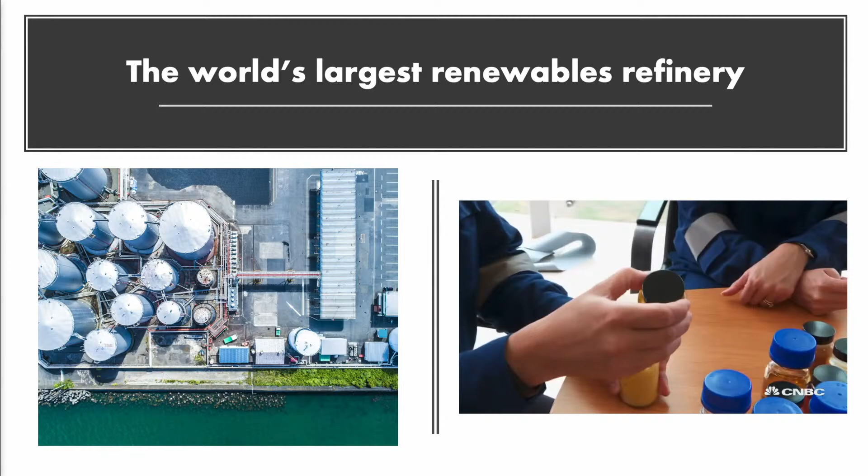For Finnish energy giant Neste, it is making a big bet here in the western end of Singapore. Neste is already the world's largest producer of renewable diesel. Now it wants to fuel growth by pumping $1.5 billion in a new refinery here in Singapore, with a capacity to double production by 2022. Effectively raising the stakes here to 2.6 million tons. So what exactly goes into generating renewable diesel? Breaking down the facts for us is Site Director Kenneth Lim. We have more than 10 different kinds of feedstocks. So this, as you can see, is the animal fat, one of the feedstocks that we use. And we also have, for example, used cooking oil, soybean oil, as well as even fish oil, fish fat. Where exactly do you source the feedstock from?

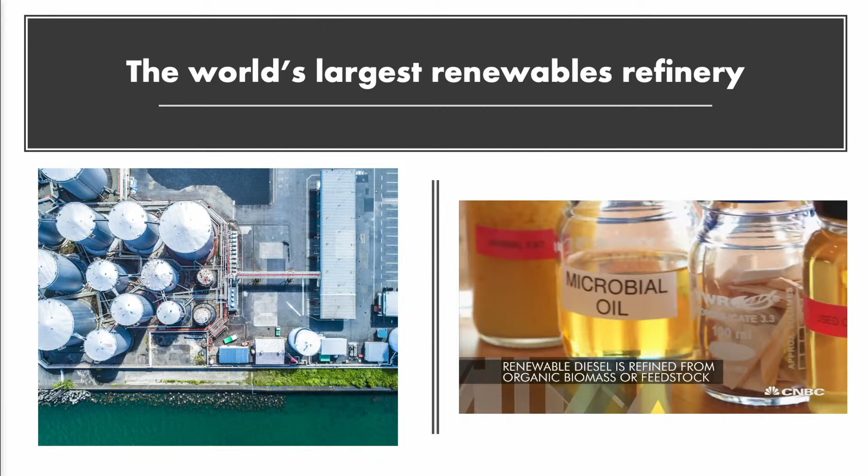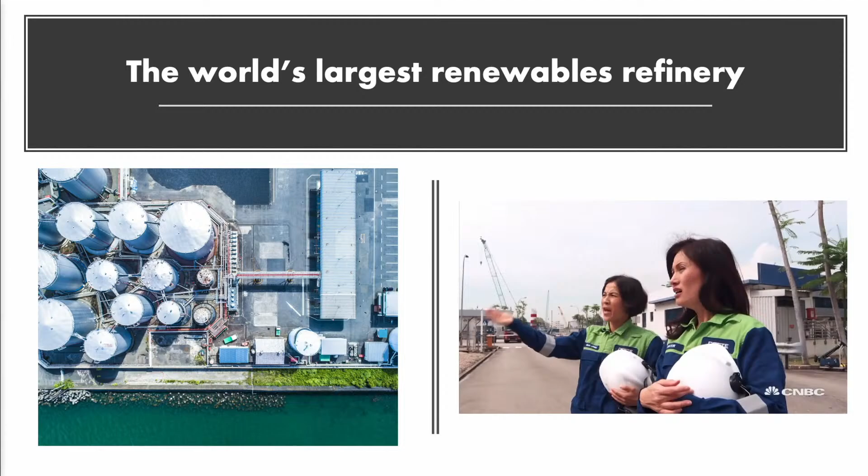In the region, we source in Australia, and right now even sourcing from China and North America. So we have a global feedstock base. I was given a tour around the high security facility. Behind here, this is the pre-treatment facility process, which means it's purifying the feedstocks. All of the feedstocks we collected are unloaded at the port. Behind it is actually the port already, so everything is unloaded there and then moved to this facility, to this

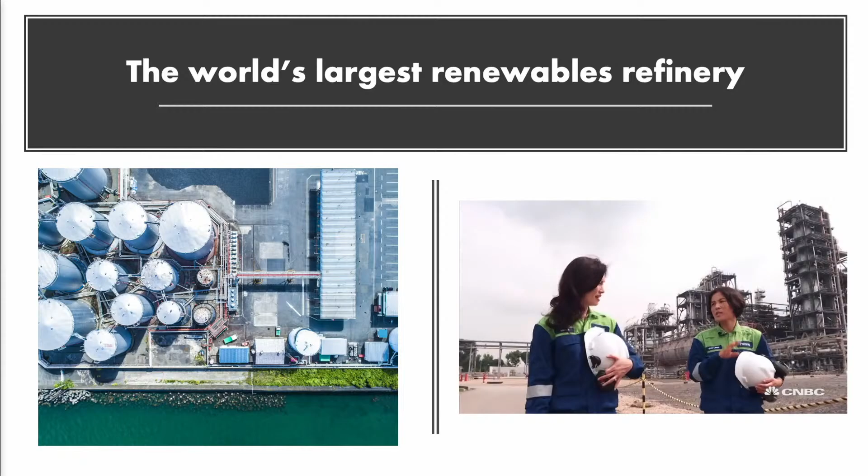process. After pre-treatment, the raw materials go to the refinery. This is the NEXBTL process, which means it converts the purified feedstocks into the renewable diesel, and it is the patented technology of Neste. So from here, it goes out into the market. Yes, before it's shipped to the customers, we will do the test of the end product to make sure it meets all of the requirements from our customers.

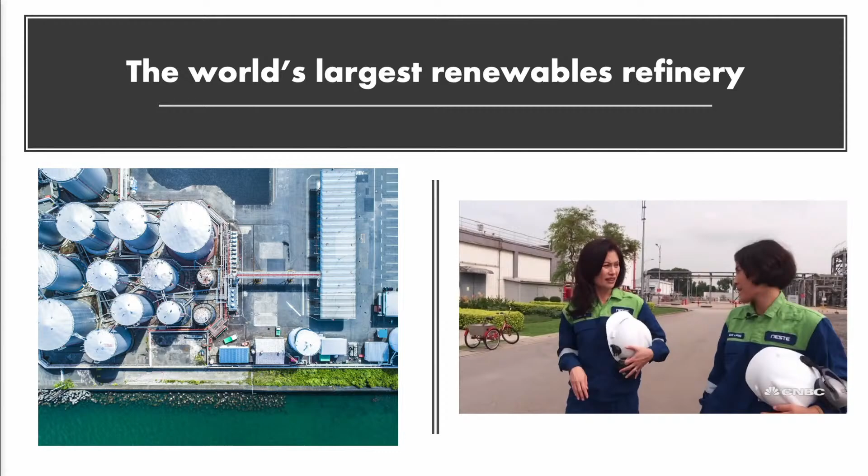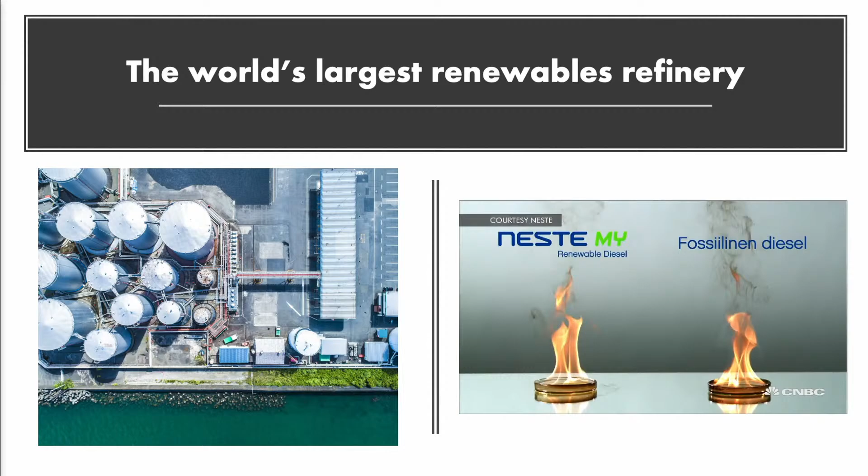The expanded plant will boost Neste's total renewables production to 4.5 million tons annually. And it comes out really clean and transparent? It is. This is what it is coming out from the plant. So unlike the fossil diesel, renewable diesel does not contain aromatics, so it's very clean. You can reduce up to 90% of carbon emissions compared to traditional fossil diesel. It burns very clean. It performs much better than the fossil diesel because it has a high cetane number.

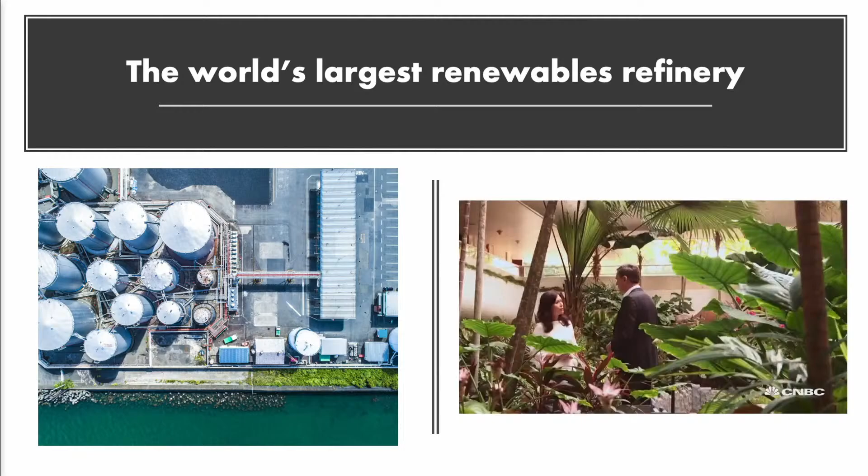CEO Peter Vanacker expects demand for renewable diesel to quadruple by 2030. We see the regulation also changing, especially in Europe. Europe is on the forefront. So there is a new regulation that is being put in place. It has been voted on the European level, the so-called RED II regulation, that is now being adopted by the member states. And that sets clear targets, mandates, and what needs to be achieved in terms of greenhouse gas

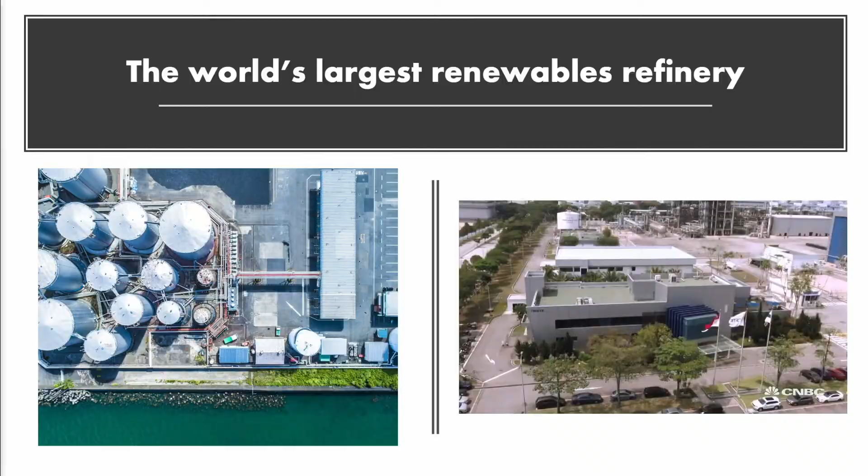emission reductions. The same is also happening in the United States, especially California being on the forefront, but not just limited to California anymore. Also some other states are setting clear regulations and enforcing mandates. Due to the regulations, there is the need also for products that are helping to reduce CO2 emissions on the planet. So this is my last slide, I believe.

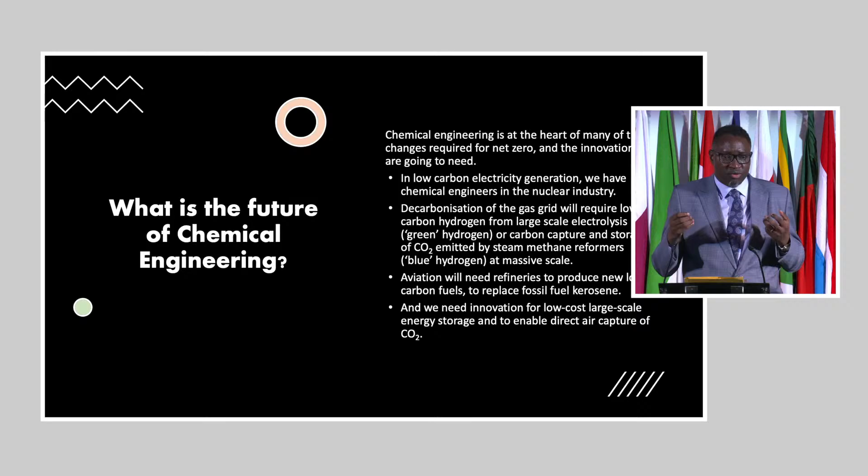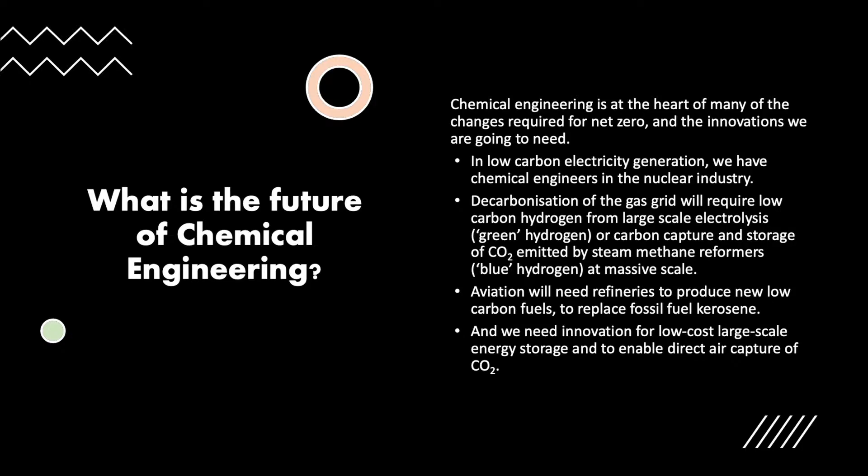So what is the future of chemical engineering? Certainly it's in those areas. It's in the carbon capture. It's in the chemical engineers who work on the models for ensuring that the CO2 can be transported to the places that use them. It's in the scaling up of some of these very innovative ways. And hopefully we eventually get to a point where there is no need for any use of fossil fuels, and we can have this future that we leave to the planet, and particularly to people in the global south, a world that's fit to live in.